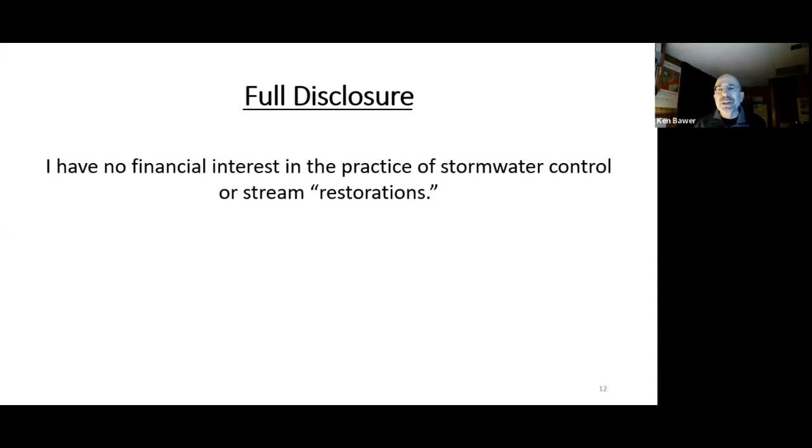And so I always throw this up: full disclosure, I have no financial interest in the practice of stormwater control or stream restorations.

So let me talk about residents' concerns and needs. The topic of stormwater control touches on many residents' concerns and needs in the area of health and safety, responsible government spending, livable communities and quality of life, as well as jobs.

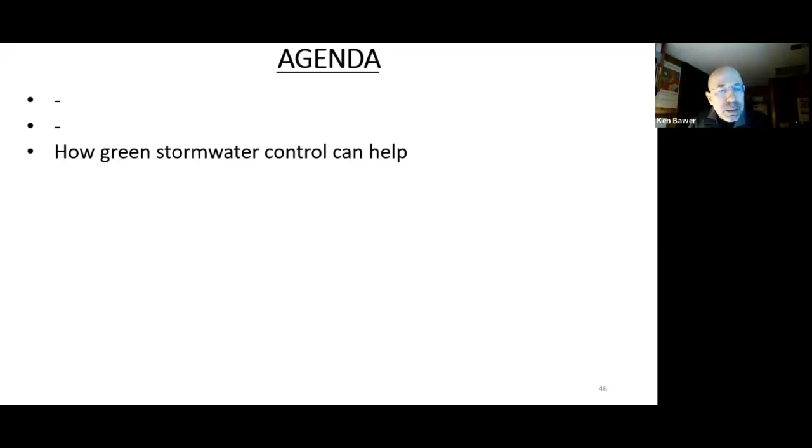The question is, how can green stormwater help? As it turns out, green stormwater control can address many of these concerns simultaneously. Let me give you some examples. In the area of health and safety, trees on the bottom left counteract heat advisories by lowering the air temperature. Bioretentions and permeable pavement, shown on the right, absorb stormwater, which can reduce urban and stream flooding.

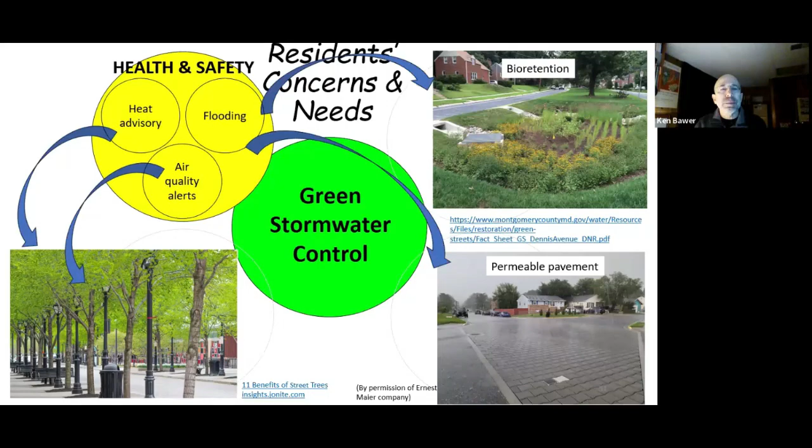In the area of responsible government spending and its impact on property values, trees, which can be used for green stormwater control, can increase property values anywhere from 3 to 15%, according to realtor.com. Having trees near your property can save energy and lower utility bills. In the area of value for taxes paid, many different types of green out-of-stream practices are more cost-effective than the in-stream practice of stream restorations.

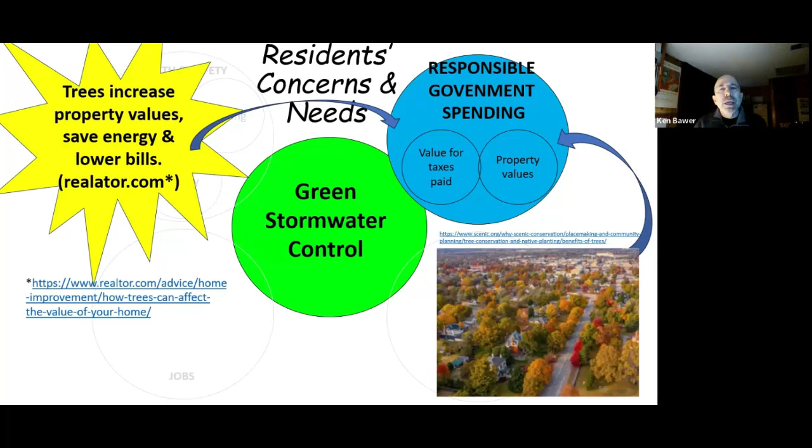Livable communities: green stormwater control using shade trees, as shown on the upper left, decreases the urban heat island effect. When you control stormwater in areas like these that have already been disturbed, you protect our natural areas, like the one shown in the upper right, by eliminating the need to do in-stream stormwater control that clear cuts sections of natural areas.

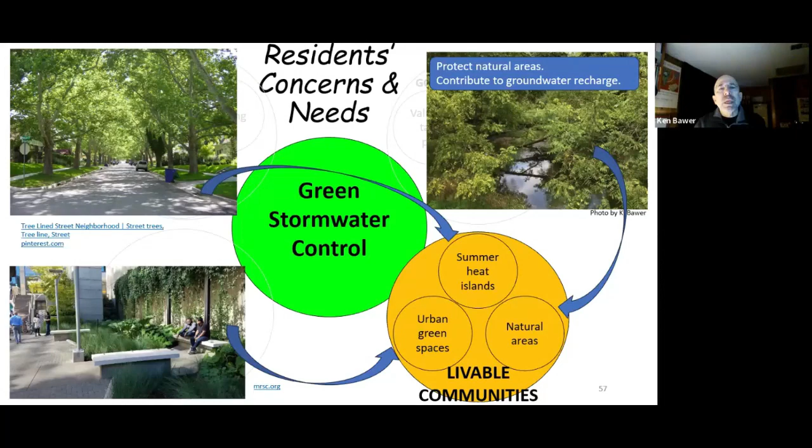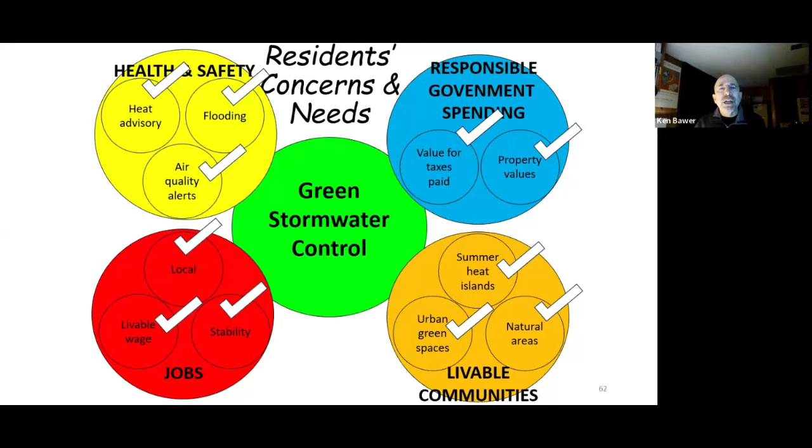The point of this slide, and I didn't show all the examples, is that green upland out-of-stream stormwater control projects address a whole array of residents' concerns and needs as co-benefits. They check off all the boxes, or circles in this case. In contrast, stormwater control using in-stream or so-called stream restoration techniques create jobs but really don't provide any of the other co-benefits.

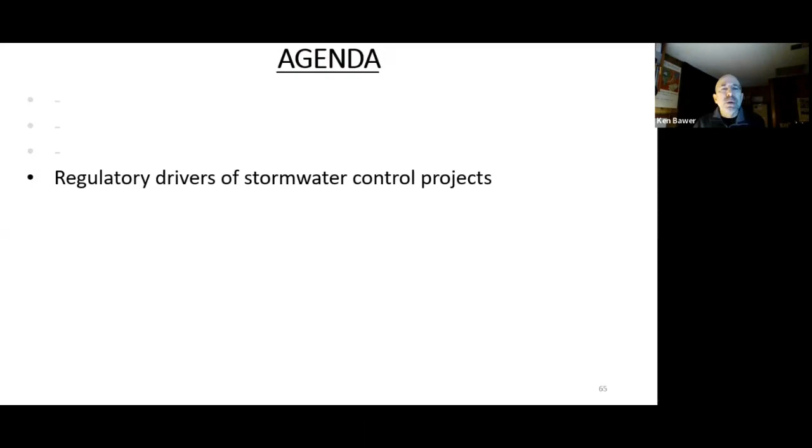So what are the regulatory drivers of stormwater control? In the case of stormwater, the primary regulatory drivers are pollutant limits imposed by the Federal Environmental Protection Agency. These are called TMDL limits, which stands for total maximum daily load, and these are limits on certain pollutants that can be sent into the Chesapeake Bay. The pollutant limits are spelled out in what's called an MS4 permit, and I'll talk about this in a moment.

Urban jurisdictions like Montgomery County, the City of Rockville, and many other areas, jurisdictions like Baltimore City and Baltimore County, have MS4 permits, and these are issued by the Maryland Department of the Environment, or MDE, on behalf of EPA.

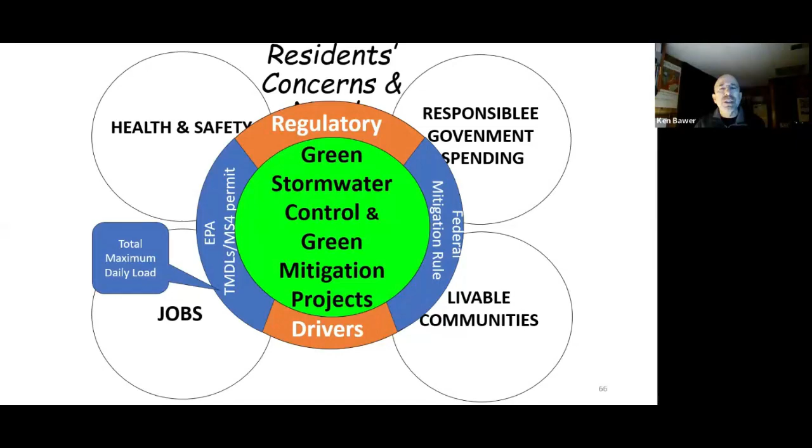Another regulatory driver of stream restorations is the federal mitigation rule, when stream restorations are done as mitigation projects. I'm going to skip this whole area in the interest of time today.

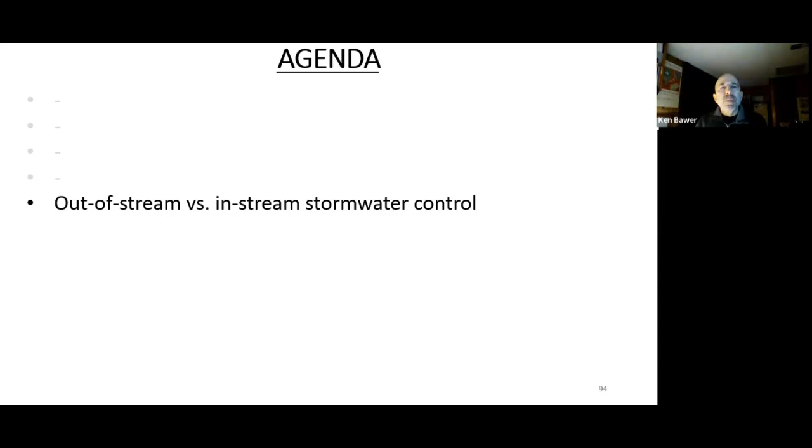Let me show you a couple more examples of what these look like; I've already shown you a couple. These are the stormwater practices that control stormwater before it enters the stream, which removes or at least decreases the cause of stream erosion in urban and suburban areas. The co-benefit of these is that they can help decrease pluvial or upland urban flooding, recharge groundwater, and provide plant and wildlife habitat instead of destroying it, which the in-stream practice does.

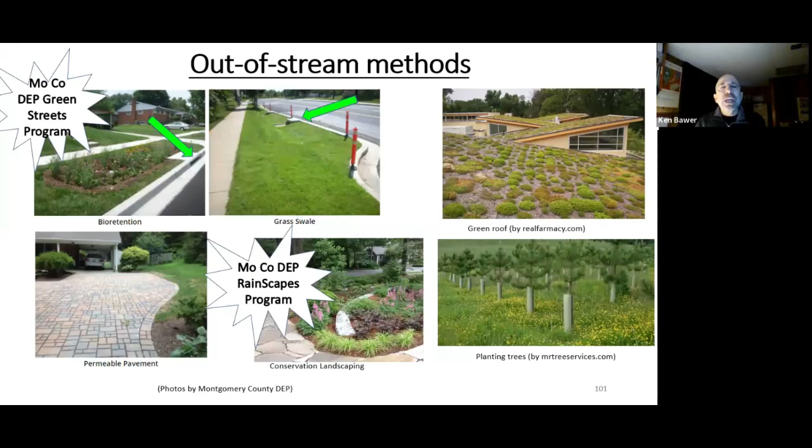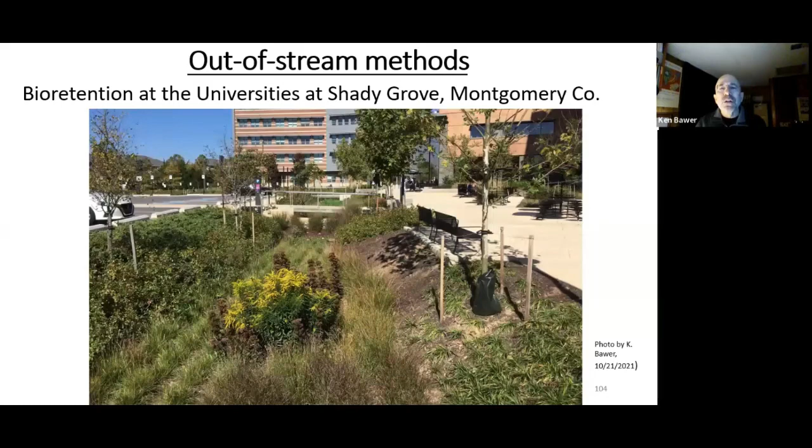The benefit of projects like this is that they're done in already disturbed areas, not in natural areas like stream valleys. There's only one destructive in-stream stormwater control method, and that's what they call stream restorations. It's really a misnomer of epic proportions, but that's what we're stuck with, because they actually destroy the natural character of streams, as I'll be showing you.

So what is stream restoration? Stream restorations are major construction projects, really pure and simply. There are several different types, but they're all engineering projects that try to stabilize eroding streams. The idea is that if you stop stream bank erosion, you prevent sediment from entering the bay, along with any nitrogen and phosphorus in the soil. These are the three main things the MS4 permit is trying to decrease. Proponents either falsely claim or imply that stream restorations will also improve the ecology of the stream at the same time, and this is simply not true, according to the scientific research I'll show you later.

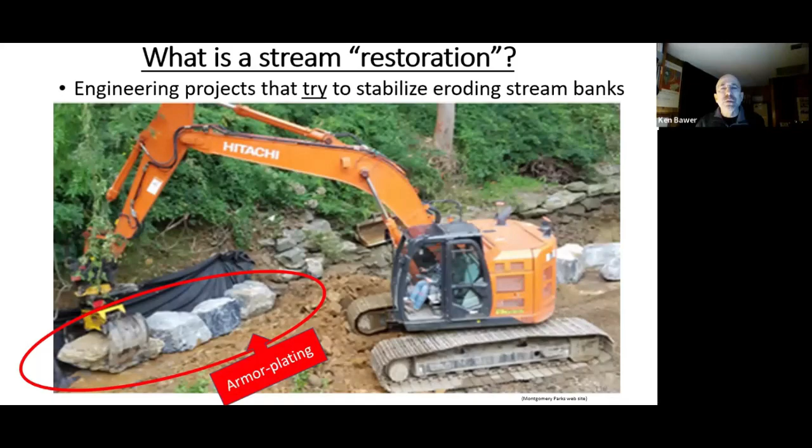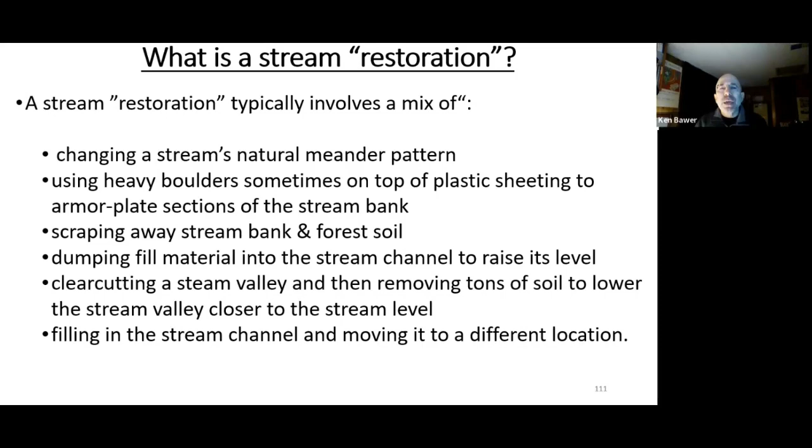A stream restoration typically involves a mix of changing a stream's natural meander pattern, using heavy boulders, sometimes on top of plastic sheeting, to armor plate sections of the stream bank, scraping away stream bank and forest soil, dumping fill material into the stream channel to raise its level. Clearcutting a stream valley and removing tons of soil to lower the valley closer to the stream level, or even filling in the stream channel and digging a completely new channel in a different location. I'll show you examples of these.

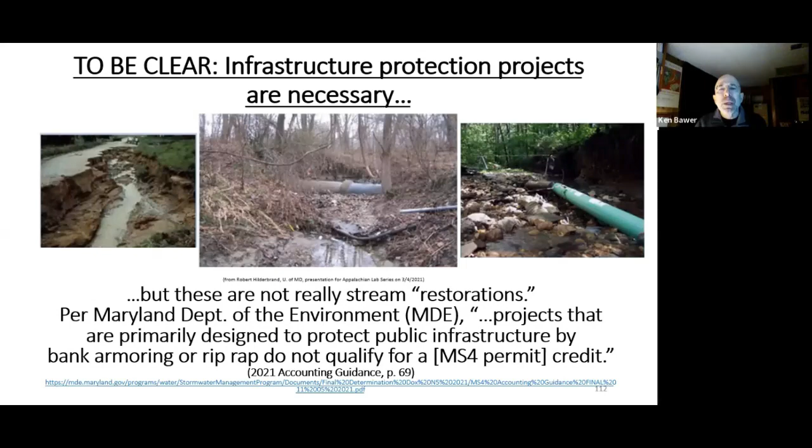Just to be clear, I'm not opposed to infrastructure protection projects, such as protecting undercut roads or exposed sewer lines as shown here. These are necessary projects, but they are not stream restoration projects. These are spot repairs on the order of tens of feet, not the hundreds or thousands of feet of a stream restoration. These infrastructure protection projects do not qualify for MS4 permit credits as stream restorations.

There are several different types of stream restorations. A typical project is a mix of these types. The first is called natural channel design, which tries to decrease stream bank erosion by changing the sinuosity of the stream and using other techniques to manipulate water flow with rock structures. The next type is referred to by different names; I'll just call it regenerative stormwater conveyance, or RSC. It creates step pools filled with gravel, fill material, and wood chips, which is supposed to remove nitrogen from the water.

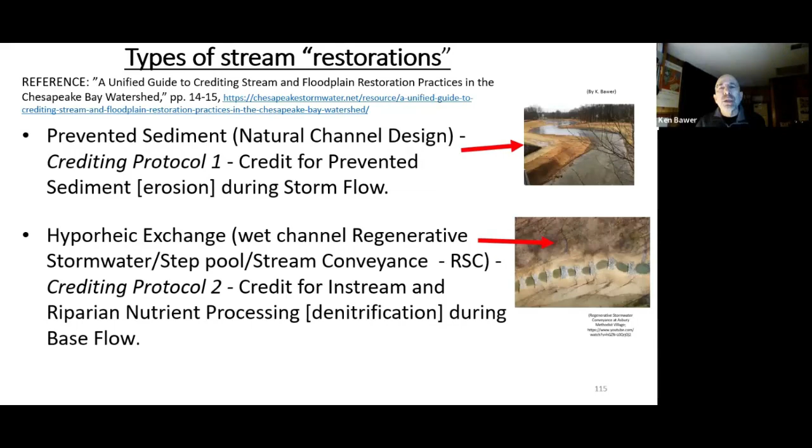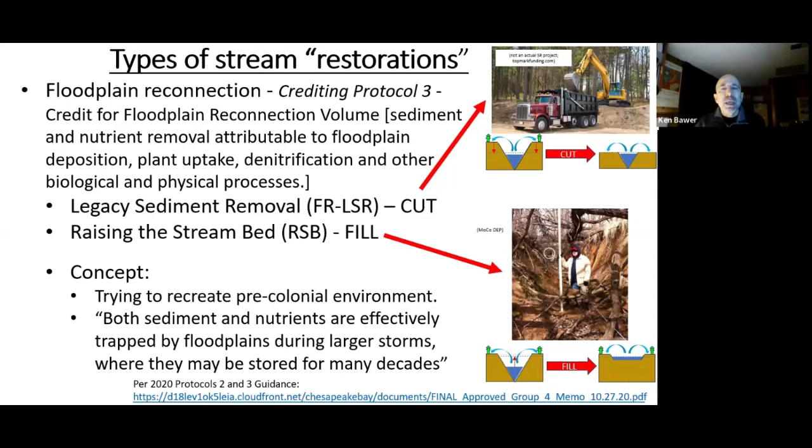In the fill method on the bottom, they fill the stream to raise its level closer to the valley floor. The stream in this case had eroded down through what may or may not have been legacy sediment, due to fire hosing of stormwater into the stream from impervious surfaces.

I'm going to show a few slides on what I call the false premise of stream restoration. Proponents claim they will recreate pre-colonial environments, which is really impossible given the current amount of watershed development and population. Here's a quote from the Chesapeake Bay Program's CESR Report: 'The Bay of the future will be different from the Bay of the past because of permanent and ongoing changes in land use, climate change, population growth, and economic development.' This is the identical set of facts on the ground that also applies to local streams.

We simply can't recreate the pre-colonial past, and to think otherwise is wishful thinking, and claiming to do so is misleading. The floodplain reconnection type of stream restoration allows trash and toxins from developed areas to be washed into our natural areas. Pollutants such as pesticides, oil, fertilizer, pet waste, tire waste, salt, and so on contained in the stormwater will be deposited in the floodplain where they are toxic to plants, animals, and people and kids running through these areas. So my rhetorical question is, why dump our garbage in our natural areas?

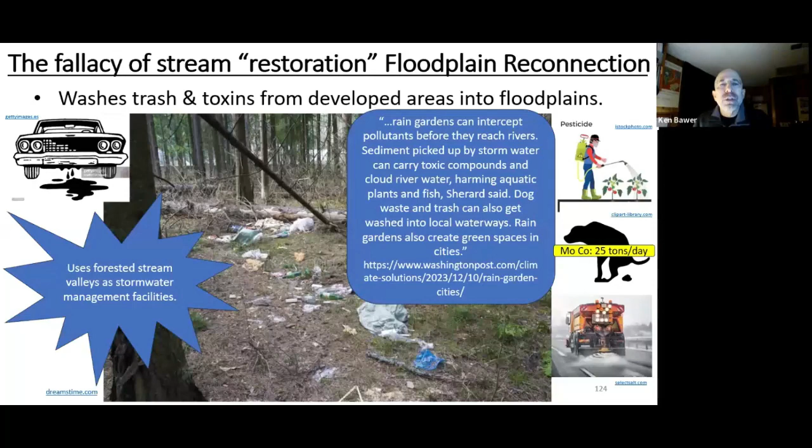On the other hand, upland stormwater control, like rain gardens, keep pollutants from developed areas out of our stream valleys.

For the method of raising the stream bed, or fill method of stream restoration, causing the existing floodplain to flood even more will eventually kill existing trees that can't handle waterlogged soil. Yes, you can replant new trees that are adapted to more saturated soil, such as sycamores and box elders, but it will take 100 years or more to replace the ecosystem benefits of the trees that were cut.

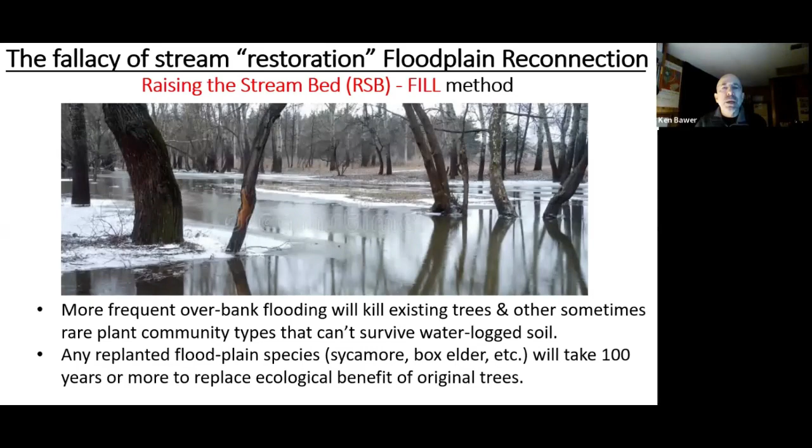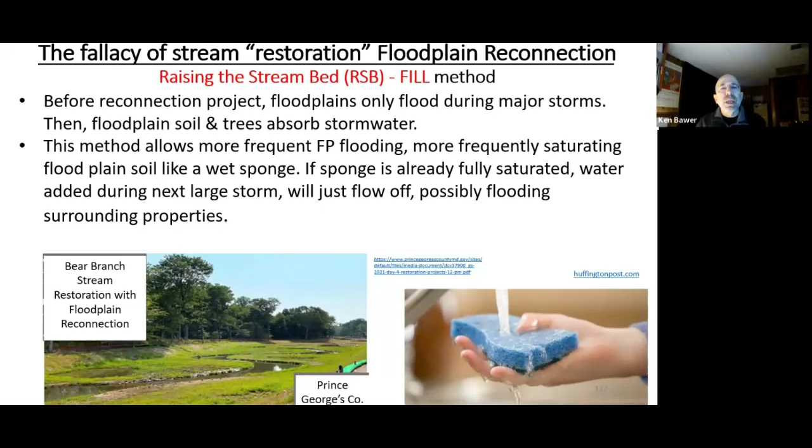Before reconnection, floodplains only flooded during major storms, and when this happened, the floodplain soil and trees absorbed stormwater. Allowing more floodplain flooding will saturate the floodplain soil more frequently, kind of like a wet sponge. And if the sponge is already fully saturated, water added during the next storm, if it occurs soon enough, will just flow off, possibly flooding surrounding properties. So my question is, what's the government liability for this flooding in terms of cost and safety?

Floodplain reconnection will result in pools of stagnant water. This is exactly where mosquitoes breed.

Arguably, the biggest problem with stream restorations is that they don't address the root cause of stream degradation. And the root cause, as I said, is uncontrolled runoff from impervious surfaces like the roads, roofs, parking lots, etc., that then fire hose into streams, causing erosion. Plus, as I'll show you, the attempted stream restoration cure is really worse than the disease.

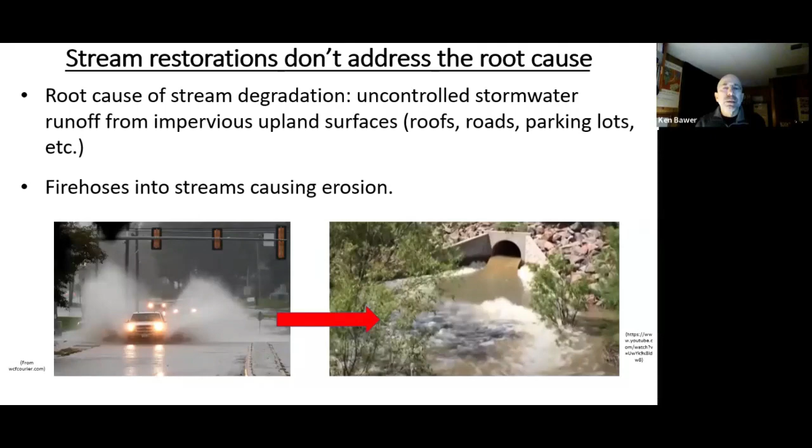So now I'm going to show you some examples of these stream restorations around the region. And I always get complaints from industry and government and other proponents that it's not fair to show pictures of the construction process or even recently completed projects.

They say, well, you have to wait a couple of years for the project to recover and it'll look nice. And I say, well, number one, you do have to show people the construction process so people know exactly what's being done to their natural areas. And number two, these areas won't recover in a few years, according to one of our eminent botanists.

And the third thing is, I would argue respectfully, it doesn't really matter what an observer thinks the final project looks like, even after a few years. What matters is what has happened to the environment.

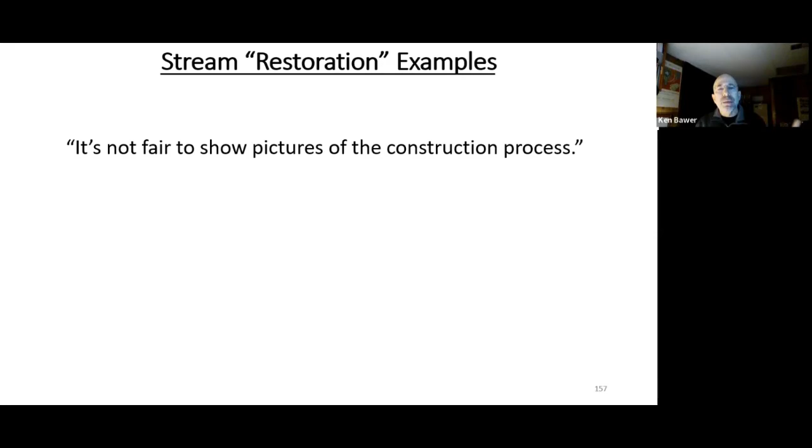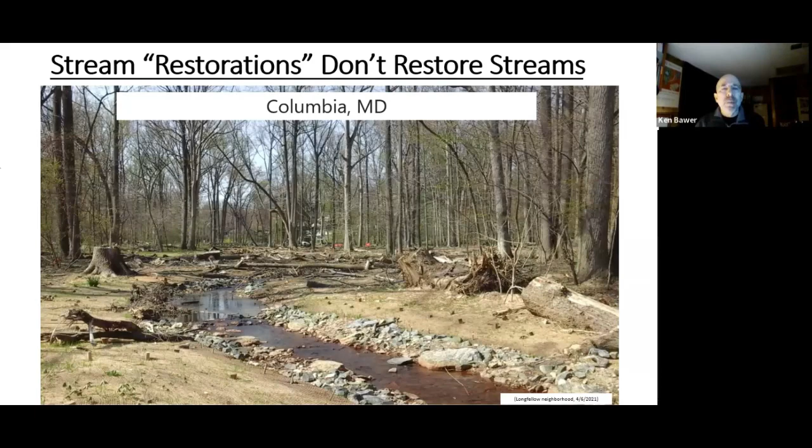This is a project in Columbia. This area used to be fully wooded, and the stream side forest plant community was totally wiped out, scraped down to bare soil.

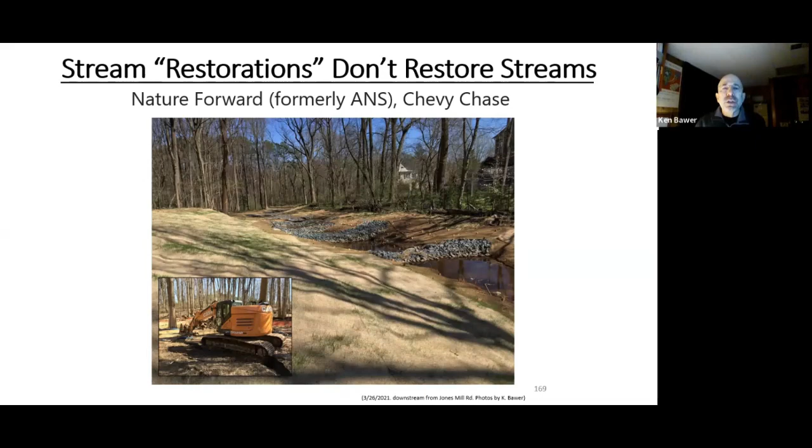They destroyed the natural character of the stream by straightening it out, armor plating sections with stones, and creating artificial rock dams to block the movement of aquatic organisms.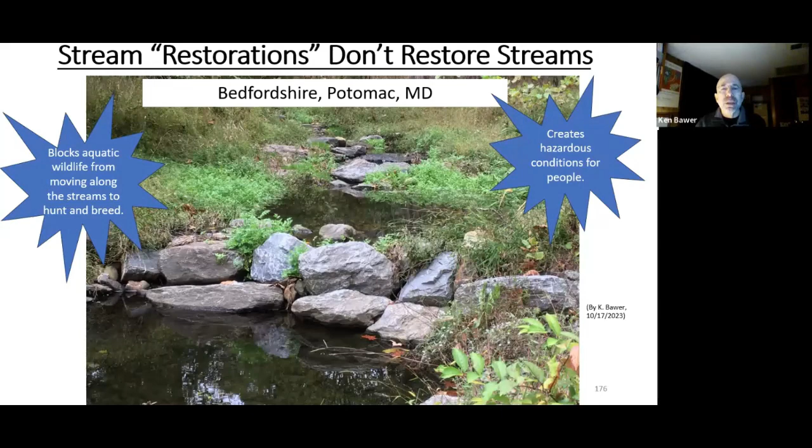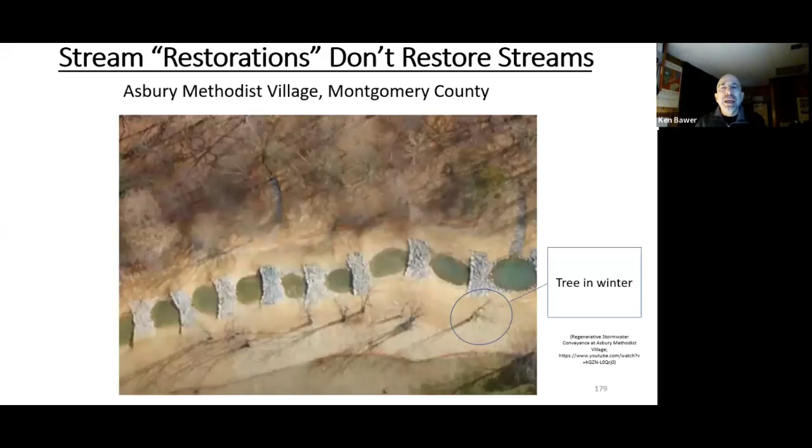This is an overhead view in Montgomery County, at Asbury Methodist Village. You can see the scale compared to the large tree that was circled at the bottom right.

This is in Rockville, Upper Watts Branch. This used to be a nicely forested stream.

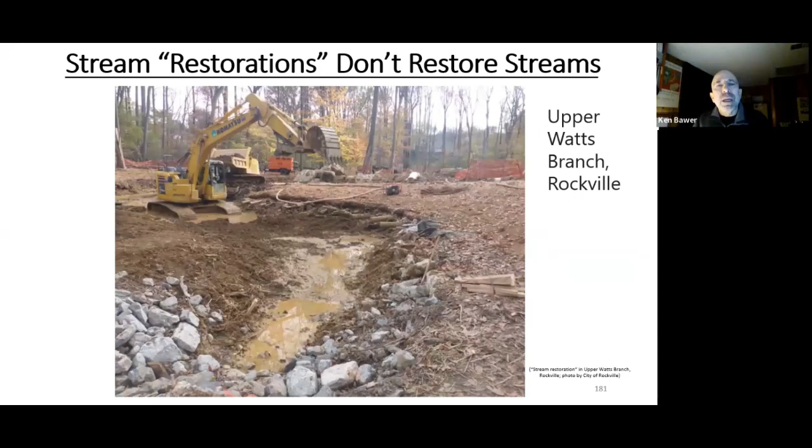And if you ask, well, what happened to the running water? I'll show you a couple of pictures in a few moments. Whetstone Run in Blohm Park in Gaithersburg, before on the left, after on the right.

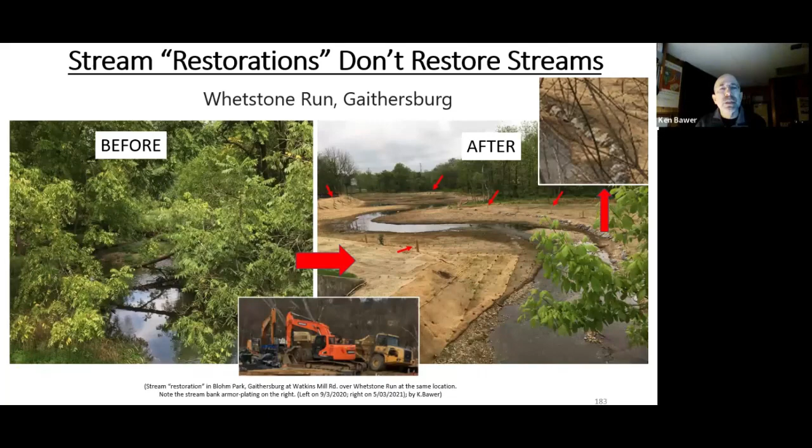Again, note the total destruction of the forest, and you can see the type of heavy equipment that was used at the bottom. On the right, the engineers used this heavy equipment to dig a completely new stream channel to make it look like this. This stream never had this kind of artificial meander pattern, which I'll prove in a bit. And the red arrows show the kind of replanting that they do, those tiny little trees.

This is a quote from the city of Gaithersburg about another of their projects, Solitaire Court, but they say it will take a year or two for the park to fully revegetate. Well, on the right, this is 2.5 years later. And yeah, there's vegetation, but the implication of fully revegetating at this location really clearly is not the case. And what was once a forest is now an area of young plants that simply do not provide the same benefits of what was destroyed, including carbon sequestration, oxygen production, stormwater absorption, wildlife habitat, and more.

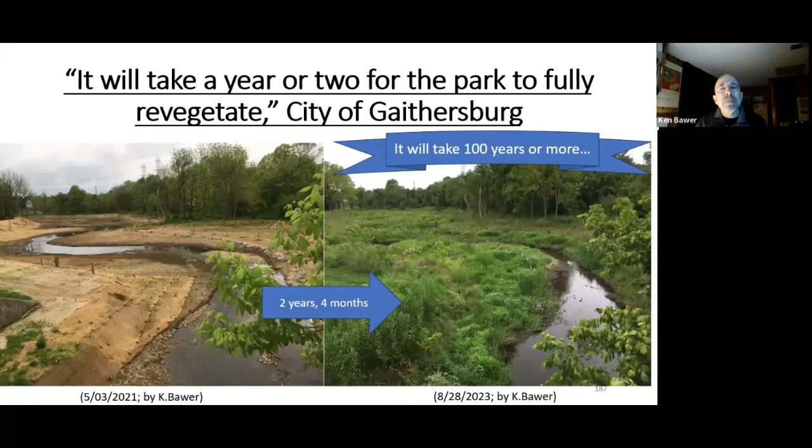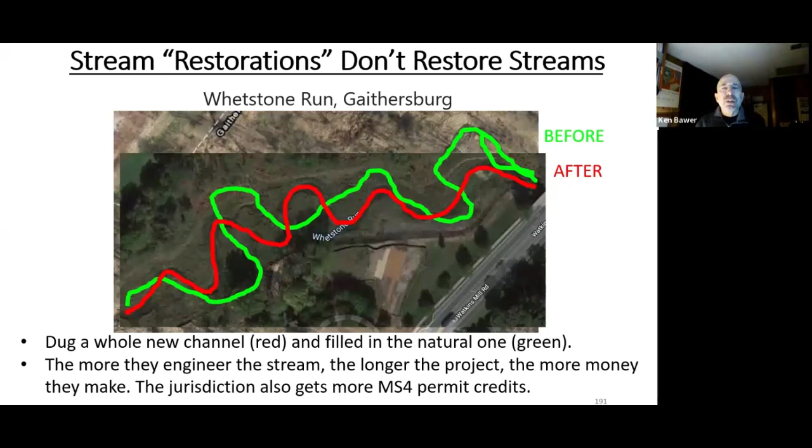So for the Whetstone Run project, you can see the before stream in green that I traced, and the after stream location in red has been completely altered. The company dug out a whole new stream channel with heavy equipment and then filled in the old channel. Why? Well, because the more they engineer the stream, the longer the project, the more money they make. The jurisdiction also gets more MS4 permit credit because they get credit by the linear foot of these stream restoration projects.

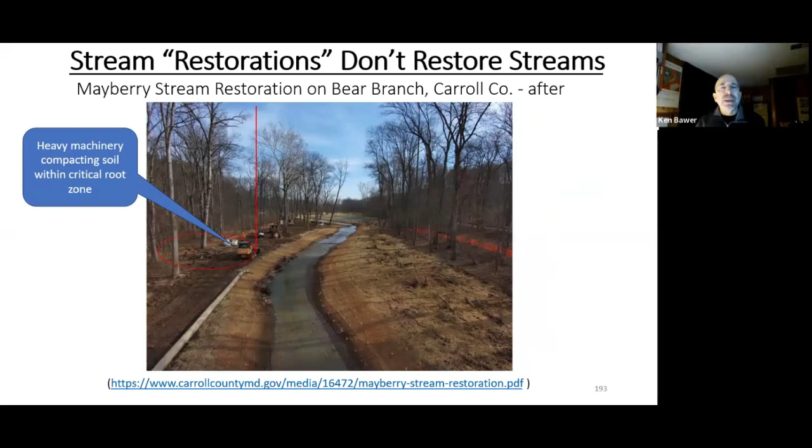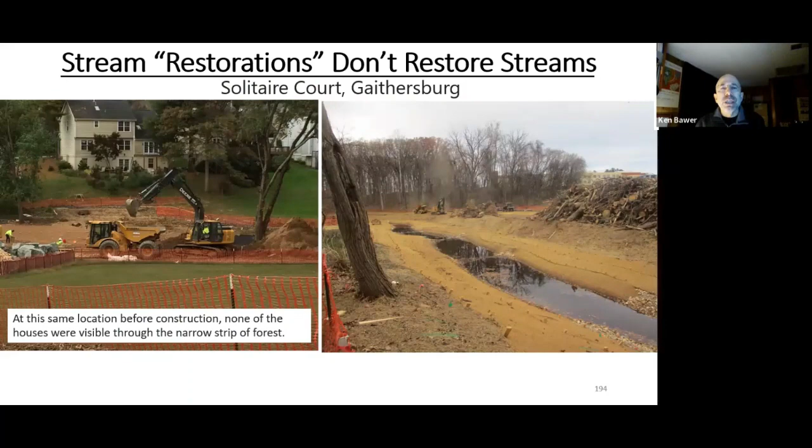Standing at this location on the left, I took both of these pictures. Standing at this location on the left, you couldn't even see those houses through the narrow forest. And on the right, you can see that the former forest is now a giant pile of logs. Another view of the same project.

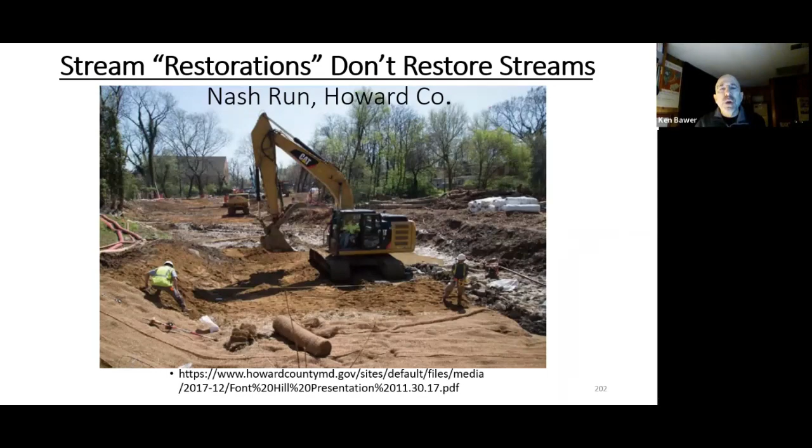This is Nash Run in Howard County. What happened to the water? Well, on the left, you can see the pipes that they used to pump the water around the area they're working, and more about this later.

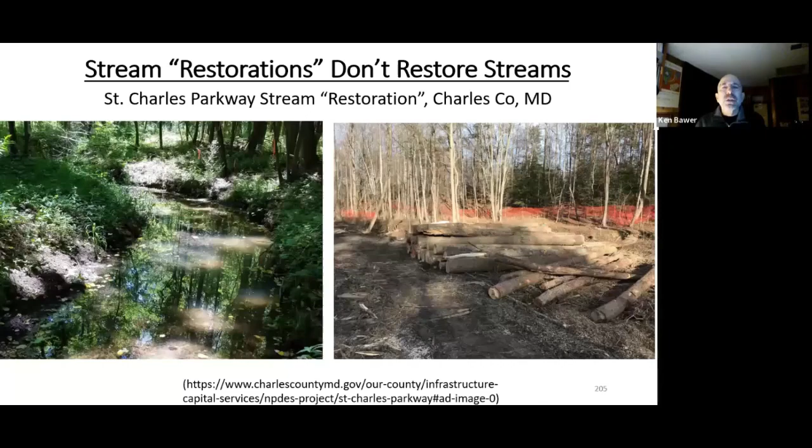This is Dead Run in Howard County. This is Scotts Level Branch in Baltimore County. Charles County, project before and after. This is more from the same project, Charles County. This is Prince George's County. This picture shows the rock debris that's dumped into the stream that will prevent the migration of fish and other aquatic organisms. And you can see the scale compared to the worker. This is tons of imported rock.

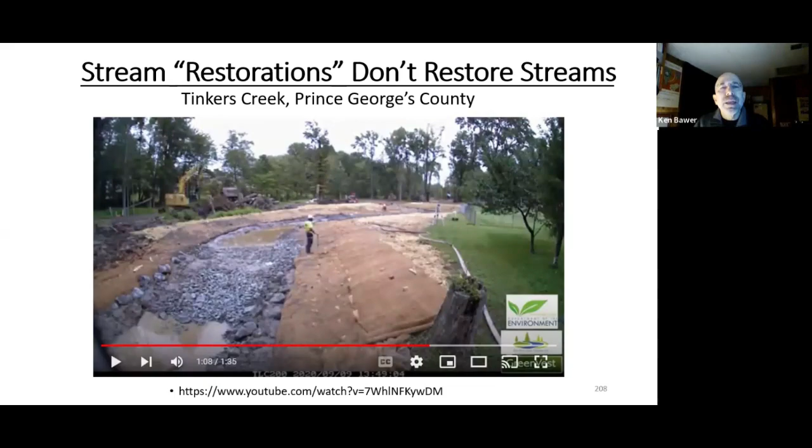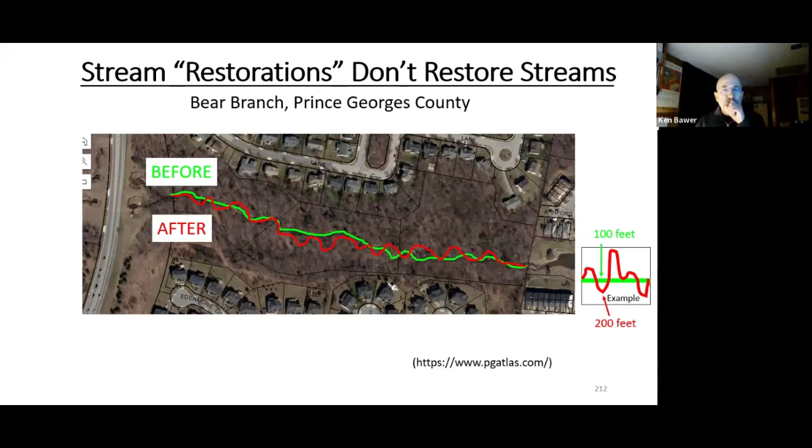Bear Branch in Prince George's County. You can see the result of the clear cut. This was a totally forested area, and you can see the artificial sinuosity of the newly engineered channel. So this is that project where I traced the aerial photographs from before and after. You can see the original stream in green and the after stream location in red.

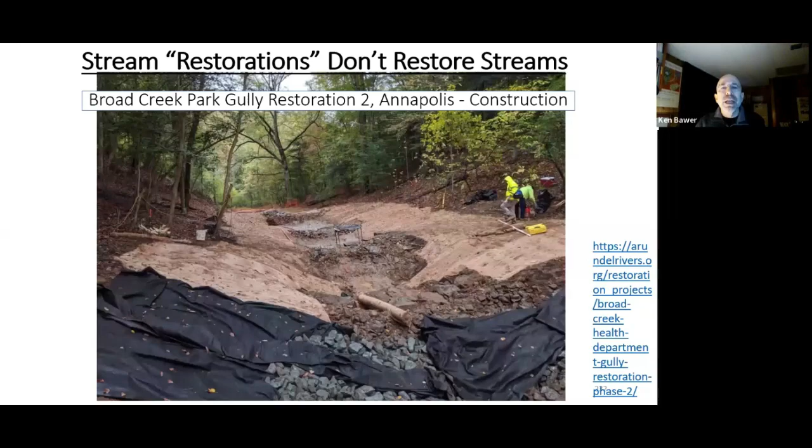This is Beaver Creek, this is now in Washington County. This is Broad Creek in Annapolis, Anne Arundel County. Same project. Notice the plastic sheeting that they dump rocks on top of, and this is done in a lot of projects. And I'll show you pictures of where these plastic sheets get exposed when the stormwater destroys the project. And this is another section of the project.

So what about the impact of invasive plants?

This slide is from a stream restoration in Alexandria. Non-native invasive plants thrive on disturbed soil, and these projects create miles of disturbed soil. They basically become highways that allow non-native invasives to penetrate deep into natural areas.

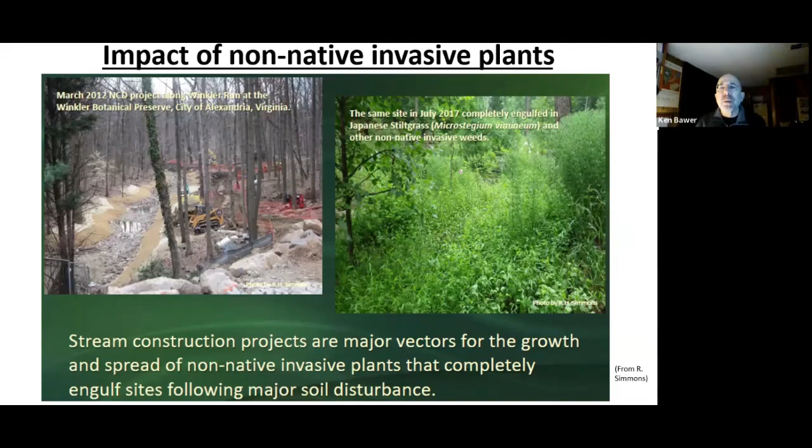The photo on the right shows the same location 5 years later, and it's covered in non-native invasives, including Japanese stilt grass. This is a quote from Rod Simmons, the former natural resources manager from the city of Alexandria. He says, quote, stream construction projects are major vectors for the growth and spread of non-native invasive plants that completely engulf sites following major soil disturbances, unquote.

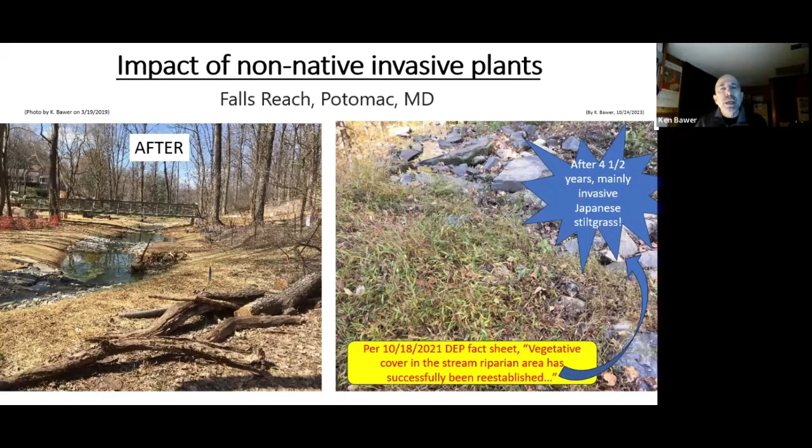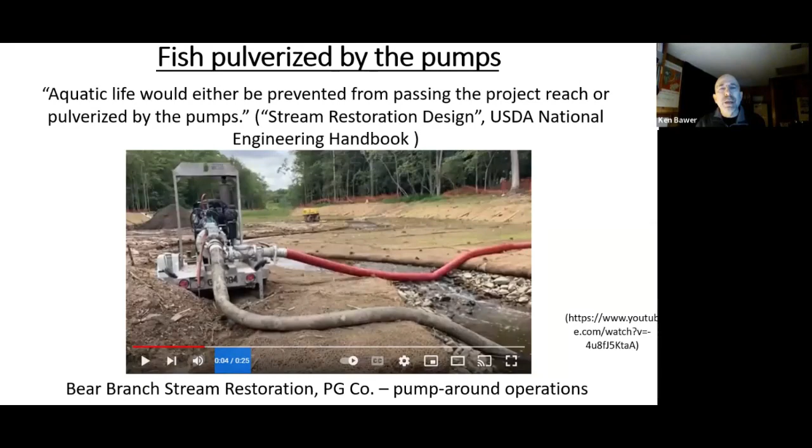This is from the Bear Branch stream restoration in PG County. Like most of these projects, the entire stream was pumped around the site during construction. According to a USDA National Engineering Handbook called Stream Restoration Design, they say aquatic life would either be prevented from passing the project or pulverized by the pump.

So what's the evidence for stream restoration failures? Again, the point is that these projects fail because they don't address the root cause of the problem, which is the stormwater coming off our impervious surfaces.

It's revealing that most of these companies only guarantee their work for 1 year. Why? Because they know that these projects are going to get blown out or washed away by future rainstorms, since the stream restorations aren't controlling the stormwater at its source.

What happens after 1 year and the projects need to be repaired? Well, we, the taxpayer, pay the bill.

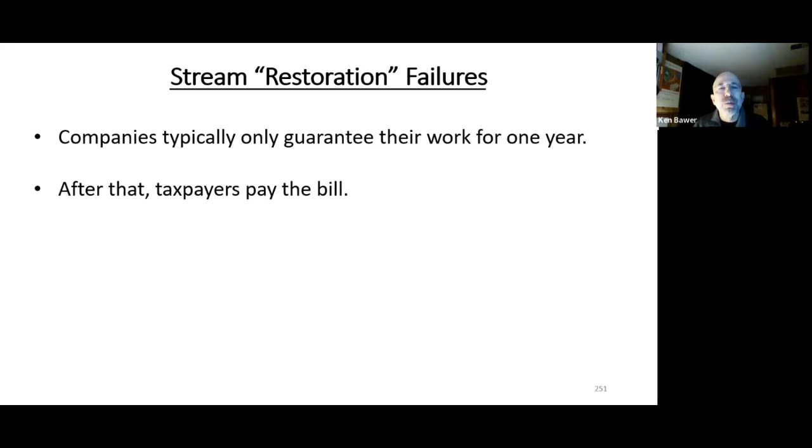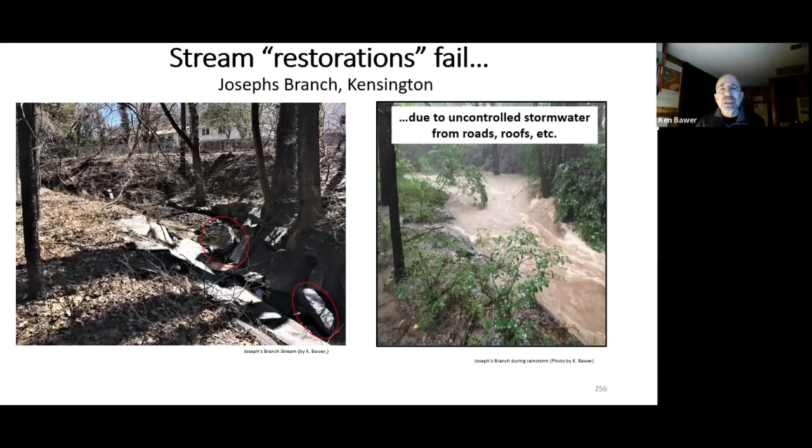This is a picture on the left, Joseph's Branch in Kensington, showing how large boulders that were used to stabilize the stream are being totally ripped out of place. All these boulders are being dislodged by stormwater that hasn't been controlled before it fire hoses into the stream, as shown in the photo on the right that I took at the exact same location during a rainstorm.

This is Snakeden Branch in Potomac. On the right, you can see the blown out area. The water has gone over and around the rock wall, has continued to erode the stream bank behind it. Here you can see the exposed plastic sheeting, which will break down once it's exposed to UV light, adding to our microplastics problem.

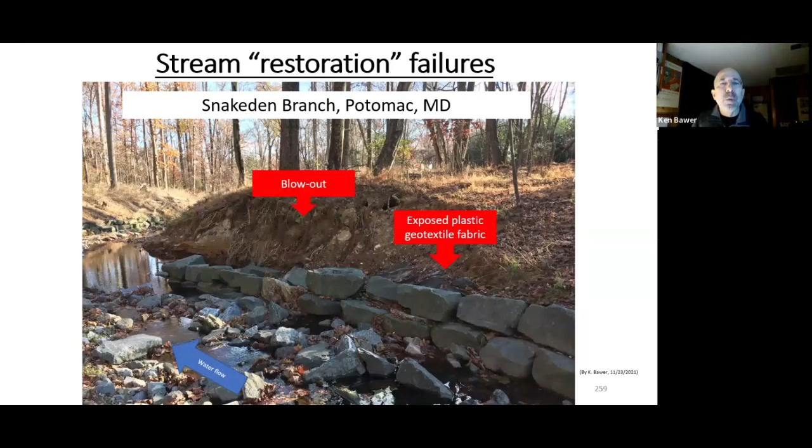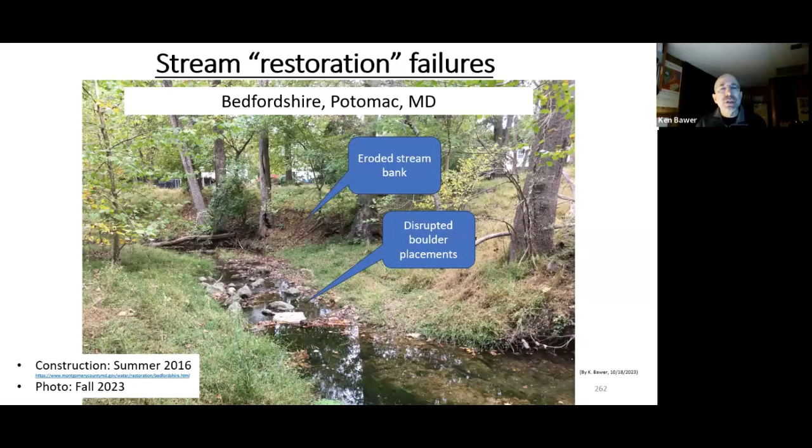This is the Bedfordshire project that shows the post-construction stream bank erosion. It also shows boulders in the stream that were disrupted from their original placement. This is the same project, and you can see this so-called restoration has failed to prevent this erosion.

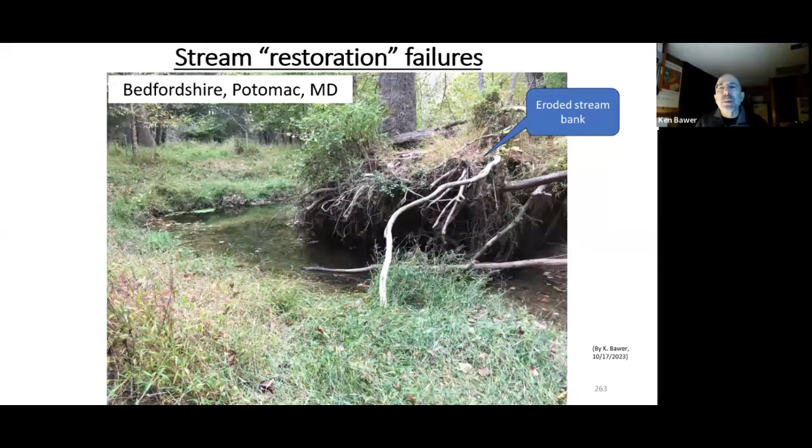By the way, this is exactly the kind of picture that Montgomery County and all these jurisdictions show to justify doing the stream restoration in the first place. They say, oh, we got to handle the erosion. Well, guess what? They don't.

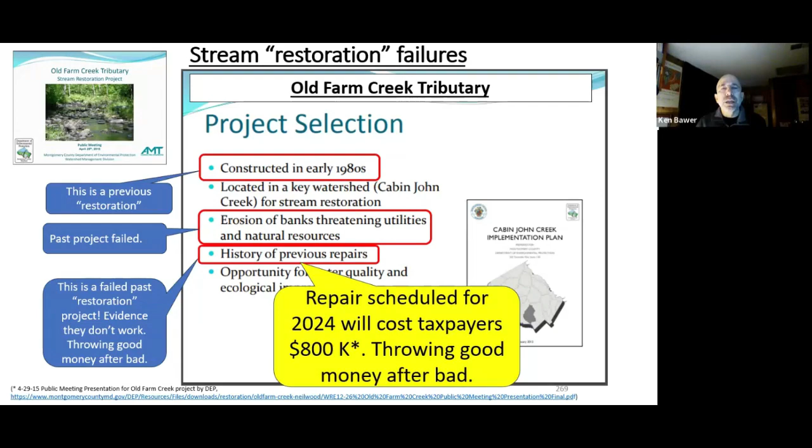The $25 billion a year stream restoration industry loves these projects because they're the gift that keep on giving. Here's the result of the long-term Grosvenor-Luxmanor stream restoration in Montgomery County.

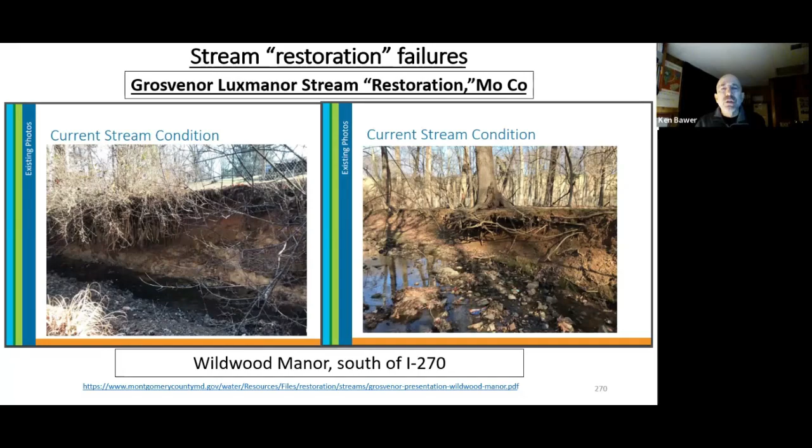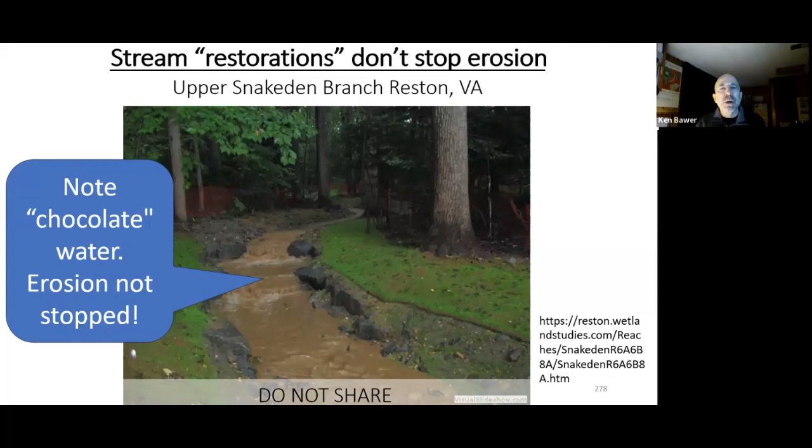So let me show you some of the science I use to show that stream restorations, in fact, do not work.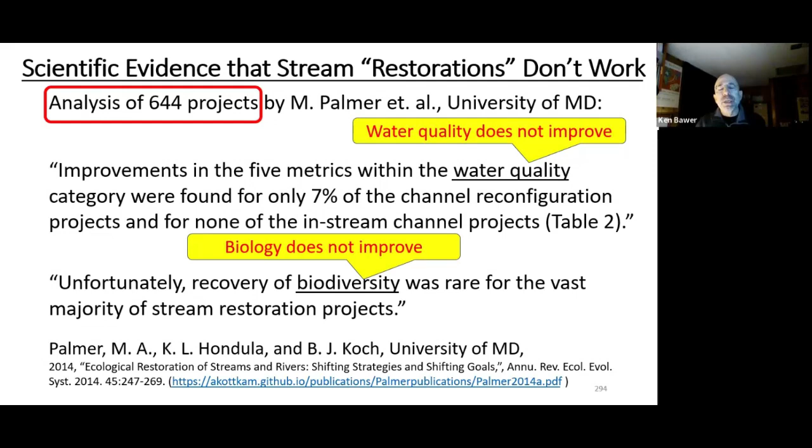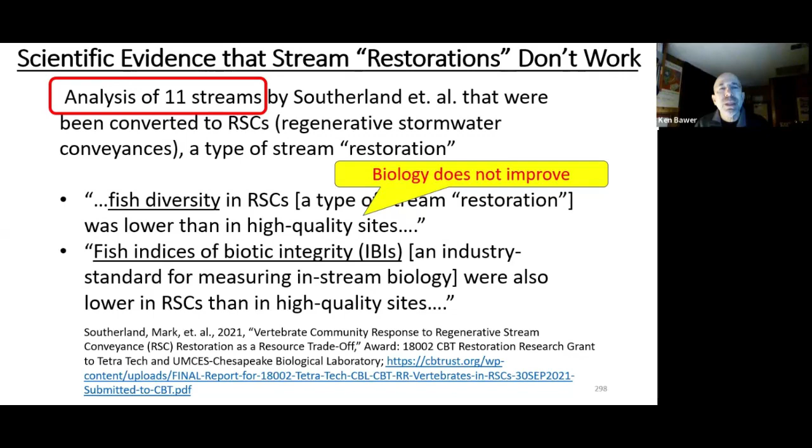Margaret Palmer of the University of Maryland did a meta-study of 644 projects and showed that water quality didn't improve, and the biology didn't improve. I have links to all these sources so you can look at them yourself. This was a meta-analysis of 40 projects by Robert Hildebrand, University of Maryland, who concludes, quote, 'there simply were few ecological differences between restored and unrestored sites.' An analysis of 11 streams in Anne Arundel County by Southerland showed that the biology did not improve, and in fact was worse after the projects.

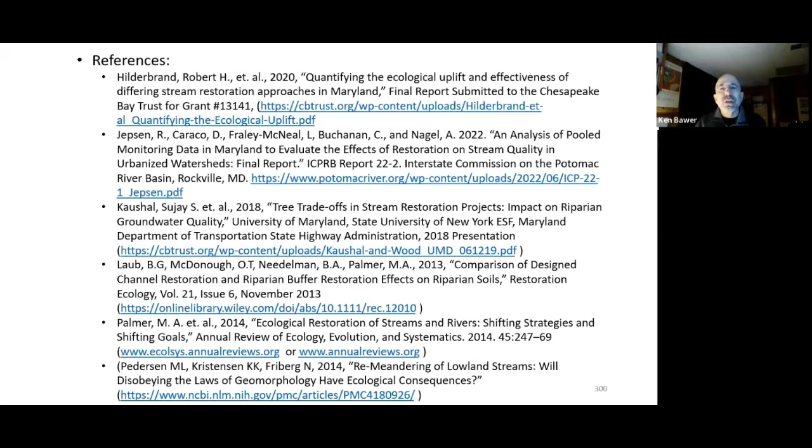This slide is just to say there are other papers as well, as I show on the next slide. Here they are—I'll make a copy of this available so you can take a look at these.

Someone might say, well, I have a paper that says Project X worked. And I say, it's not surprising that some projects may be shown to be successful in terms of nitrogen, phosphorus, and sediment reduction, and maybe even biological uplift. But the meta-studies show that the successful projects are outliers—these are the rare exceptions rather than the rule.

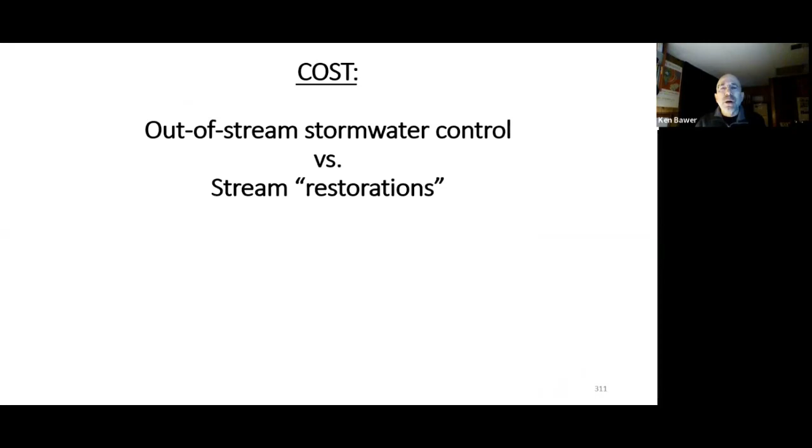So what about the cost of out-of-stream stormwater control versus stream restorations? Most jurisdictions and the industry say the reason they do stream restorations is that they're a cost-effective, and sometimes the most cost-effective, way to meet the MS4 permit.

So to summarize, there are 20 non-stream practices that are cheaper than stream restorations, but really we should be comparing the life cycle cost—construction plus maintenance plus repair, for example. But MDE doesn't provide this data. I asked them for it; they said they're not required by law to provide it. Montgomery County doesn't provide it either, and I've asked them for it.

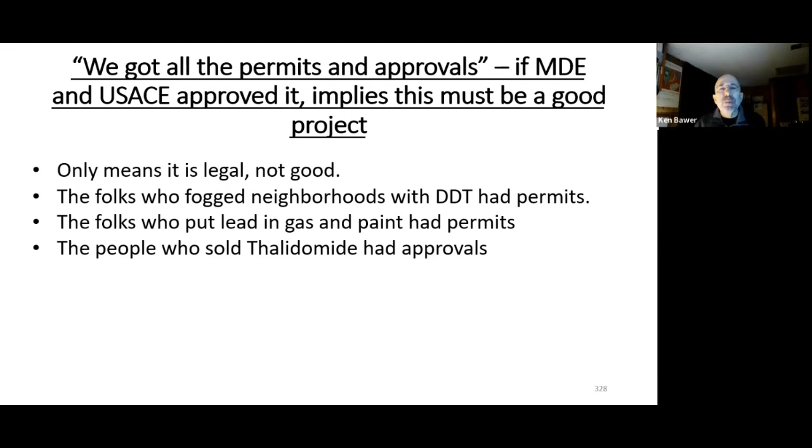Some jurisdictions imply that they're required to do stream restorations, but in fact, no regulations actually require stream restorations. Certainly regulations encourage them to be done by virtue of the MS4 permit crediting scheme that is controlled by MDE.

Another reason stream restorations are still being done is, frankly, the disinformation presented by the industry and local governments that there's not enough space for upland or out-of-stream stormwater control projects. This is demonstrably false. There are locations everywhere you look, and the proponents of stream restorations constantly say this. Montgomery County constantly says this, but they conveniently never show any data. They just wave their arms.

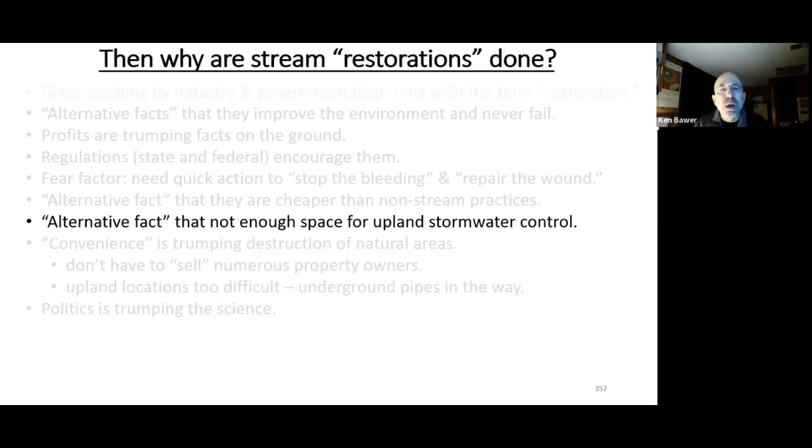So let me just give you a simple example. When someone says there's not enough land for upland stormwater control, they're frankly giving disinformation, and they're just not looking hard enough. So this is a potential location for stormwater control, just one location, I admit, in Kensington. And right now, all the stormwater from the street ends up going into the drain and right into Rock Creek Park.

Let me just show you a mock of what this could look like. It's crude, admittedly, but this whole median could be a huge, beautiful bioretention filled with native plants to take water off the street. And every house that you saw on the side could have a bioretention or a rain garden in the front to take stormwater runoff from the street. Plus the road could be repaved with permeable pavement. I have data from one company that says they can actually do permeable pavement cheaper than regular asphalt or concrete.

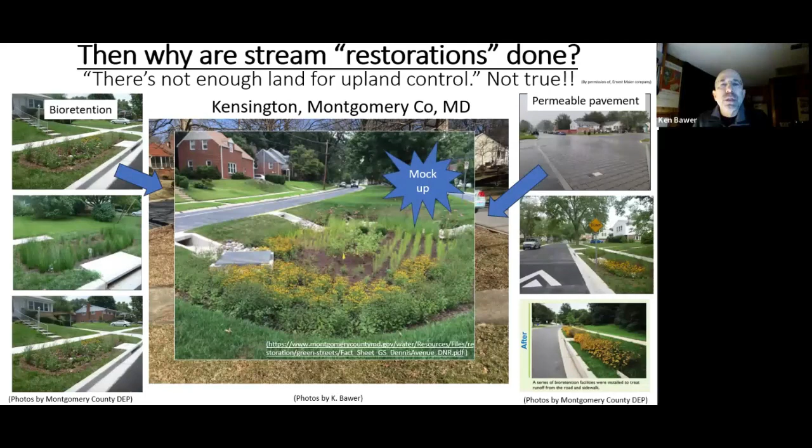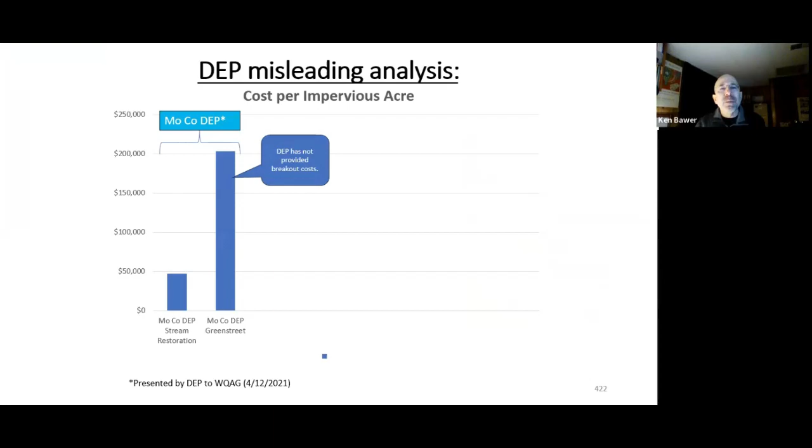The fallacy of the comparison is that the single practice of stream restorations at $47K is being compared to green streets, which is actually a mix of at least 7 different practices, including rain gardens, bioretentions, etc. They don't break out the prices. And so what I've done is I've taken that, put it into a PowerPoint just so I can add some more information.

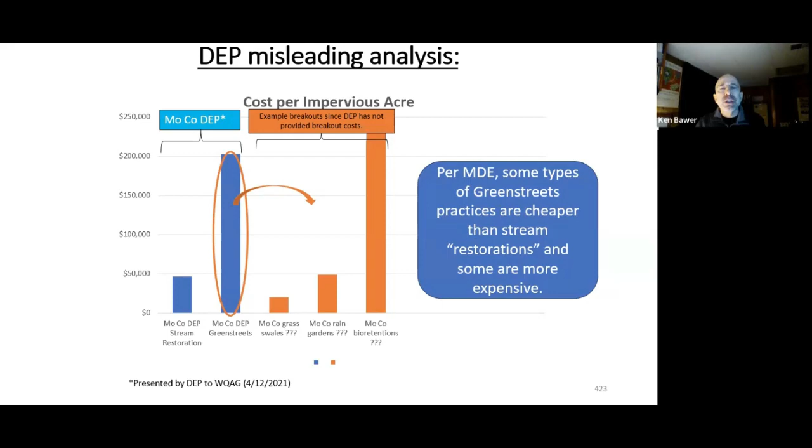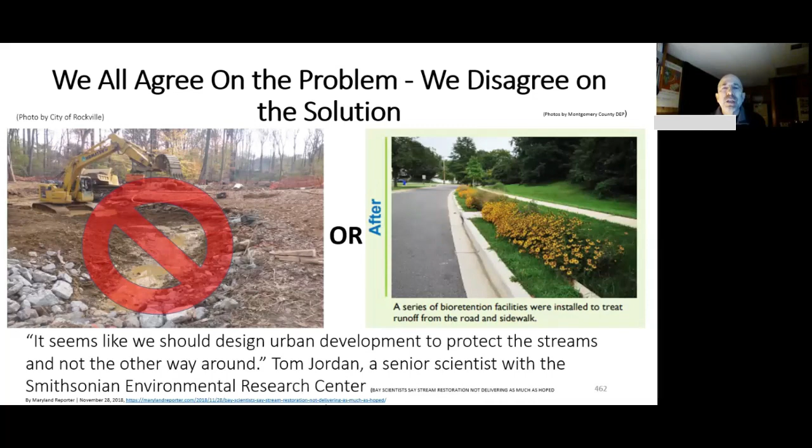So to conclude, I think we can all agree on the problem: how do we handle stormwater? We just disagree on the solution. Here's a quote from Tom Jordan, Smithsonian Environmental Research Center. He says, 'It seems like we should design urban development to protect the streams, not the other way around.'

So in summary, here are a list of reasons to incentivize out-of-stream stormwater control. Number one, out-of-stream stormwater control practices address a whole list of residents' concerns, such as flooding, reducing heat island effects, property values, urban green spaces, and protecting natural areas.

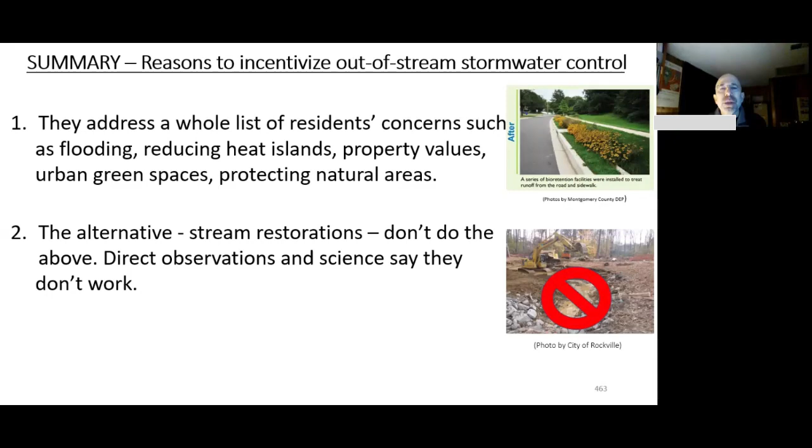Number two, the alternative, stream restorations, do none of these things. They destroy natural areas, and direct observations and the science show they don't work. Number three, there are 20 practices that are less expensive than stream restorations.

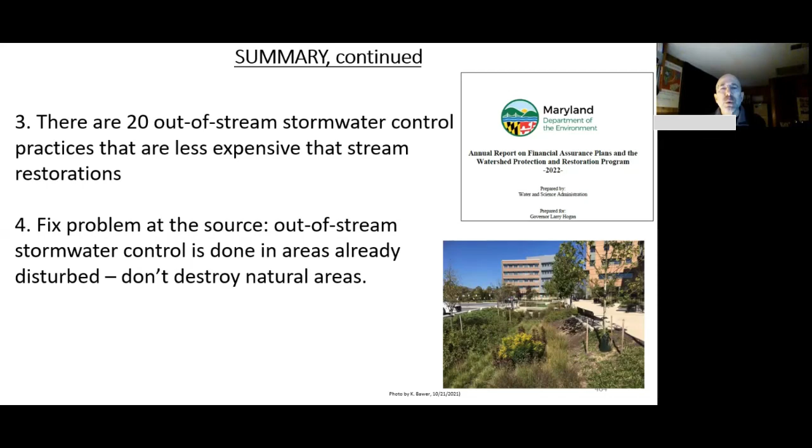And number four, the way to fix streams is to fix the problem at its source, to control stormwater outside of streams by non-destructive practices, such as rain gardens, bioswales, etc. These projects don't destroy our natural areas.